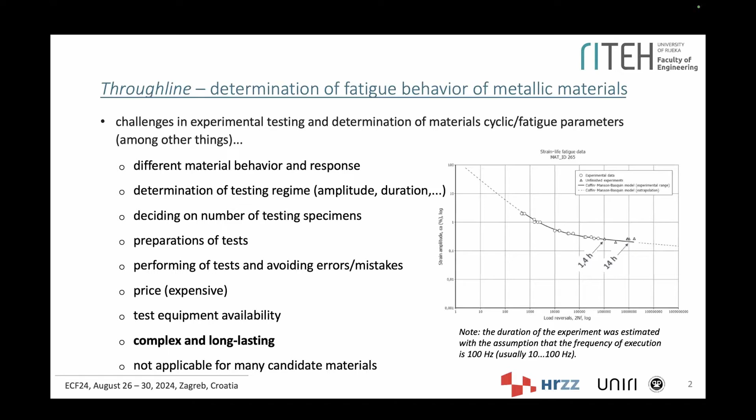Most of you are also familiar with challenges that come with performing experiments. You have to make a series of decisions, but even if you do everything properly, cyclic experiments are long-lasting, they are expensive, and often data are not available in early stages of product design.

So in the last 6 or 7 decades, estimation methods are being developed constantly. Mostly those are some kind of analytical expressions that try to predict or estimate strain life parameters from monotonic parameters. Nowadays, more and more different kinds of machine learning algorithms are used for the same problem.

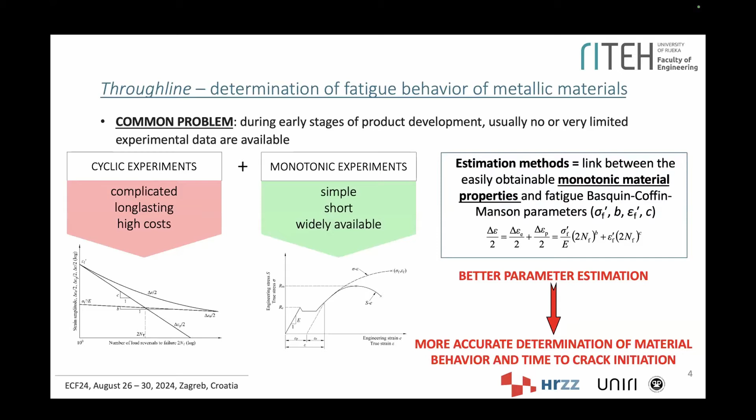So what is basically the goal? To have better parameter estimation and more accurate determination of material behavior and time to crack initiation. What we do is take monotonic properties from tensile tests.

We develop either analytical equations - maybe some of you are familiar with the hardness method proposed by Roessle and Fatemi - or nowadays, as I mentioned, we use a machine learning model and obtain some estimations of strain life parameters. Then we can use that to calculate the strain life behavior.

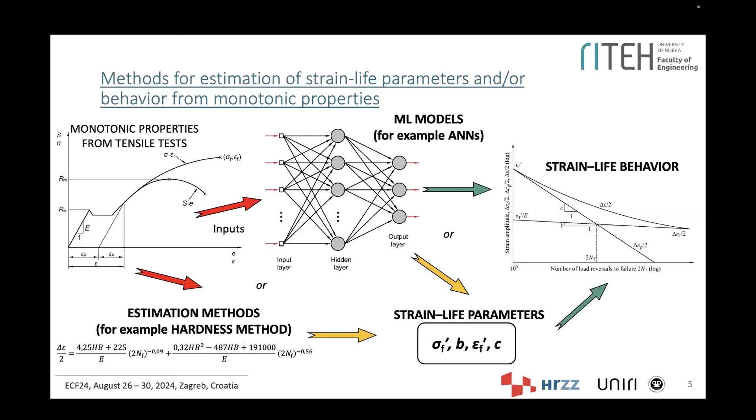So it doesn't matter the approach, but how we evaluate those methods. Usually we see some plots - for example, comparison of experimental and estimated curve. And then in papers, we read it shows good agreement, right? Okay, but we don't have numbers in particular, or we have just some general trend data without details.

Sometimes we see such scatter plots, and usually we have some kind of trend line here - a scatter plot that shows agreement between experimental and estimated data, and we have some percentage of how much data estimated falls within a certain scatter band, usually a scatter band of 3. And then again, we say, okay, it shows good agreement.

However, this is not enough to say our method is really good, or maybe it's not that good. So Park and Song in 1995 proposed additional criteria - numerical criteria that address not only the percentage of data that falls within a scatter band of 3, but also try to estimate how well the method performs, like if we evaluate on a certain data set altogether or for a single material. So those are these two.

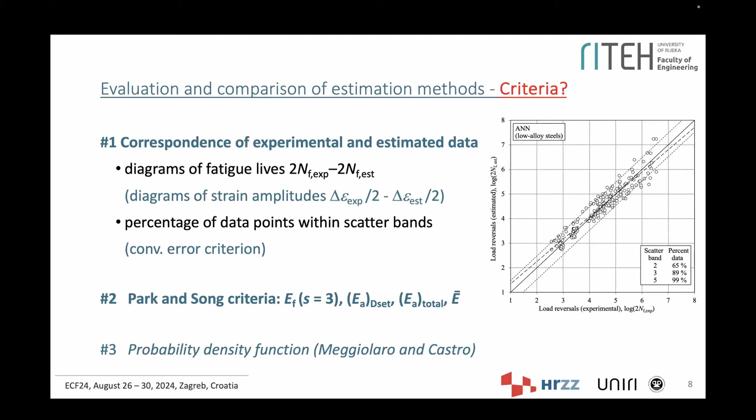You can imagine one is connected to this trend line, this dashed one, and one is connected with single data sets, and then in a certain way it is calculated. They also proposed that an average value of these three criteria is calculated, and then to make some conclusions.

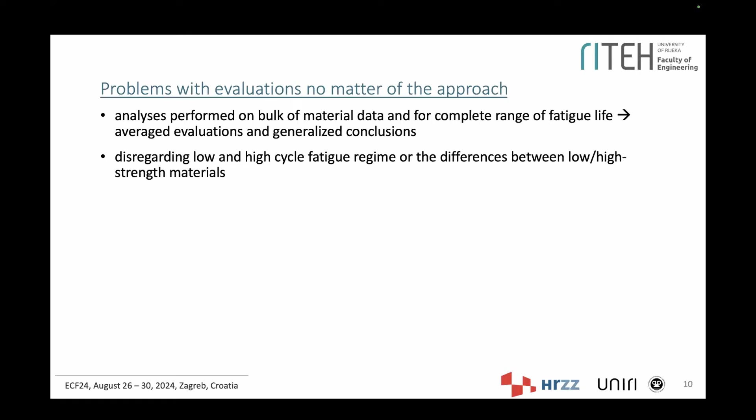So these criteria are more or less used - I would say less - but yet again, we have additional problems with evaluations. Those are commonly done on bulk material data, maybe disregarding certain subgroups of steels or metallic material in general. So everything is put together, I don't know, steels, aluminum, alloys. It's often performed for low cycle and high cycle fatigue regimes, and maybe some other specificities, particularities of certain material groups is disregarded.

So high strength materials or low strength materials - this is a problem in general with all evaluations, and there is an additional problem with machine learning based models. I will focus in this presentation on artificial neural networks because I did that. There are two aspects of evaluation. Usually performance of artificial neural network is made in some kind of way - we use various statistics like mean relative error or coefficient of correlation, coefficient of determination, and then say, okay, this is good or this is not good.

The final result, estimation of strain life behavior, is usually not done. Or if it is done, we also see some scatter plots, and we get a percentage of data that falls within a certain scatter band, and that's it, without detailed criteria. But as far as I've seen, nobody used Park and Song's criteria.

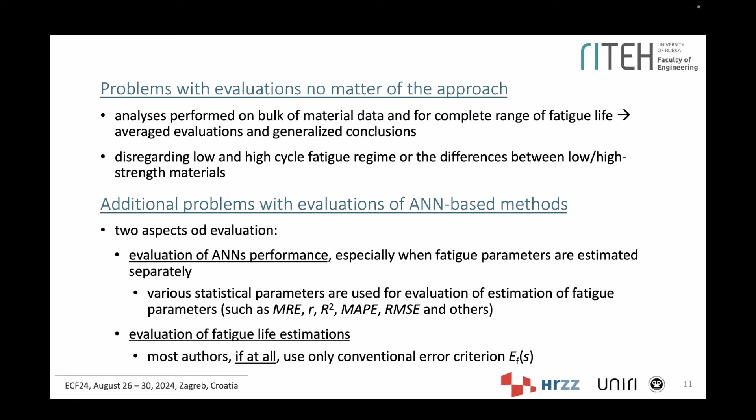for detailed assessment of results estimated with machine learning based predicted strain life parameters. Recently we published a paper in which we proposed that these Park and Song criteria are used, but that steels are divided - when we take those estimated strain life parameters and obtain fatigue lives, these are divided into low cycle and high cycle fatigue, and also high strength and low strength materials are treated separately.

You see the boundaries for steels. My colleague will tomorrow present results for aluminum and titanium alloys that differ a bit according to division, but the principle is the same. And of course, we treat unalloyed, low alloy, and high alloy steels separately.

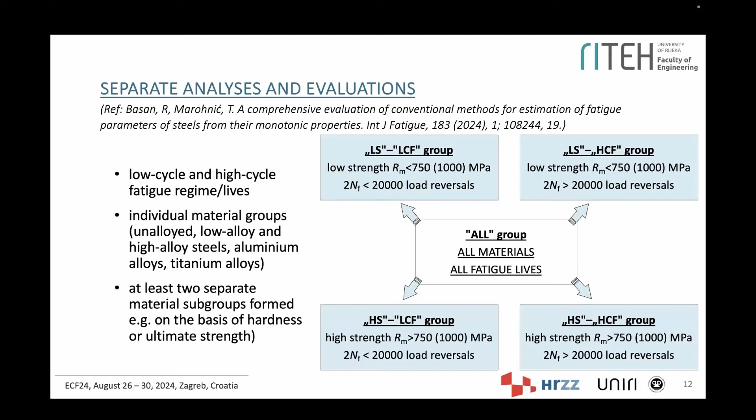Every time we do evaluations, we always use unseen data. That means those were not used for development of artificial neural networks, but we also wanted to get objective results. So we made sure as much as we could that these data were also not used in development of evaluation methods - hardness method by Roessle and Fatemi, uniform material law, and those that we chose.

I will show you, because the time is limited, the results for strain life parameters first. But every method takes monotonic properties, calculates in some way. We used artificial neural networks, and now we are at this step. We use the estimated values of strain life parameters.

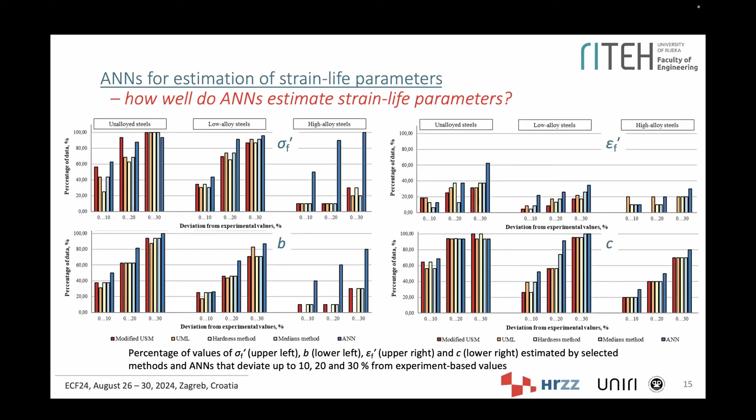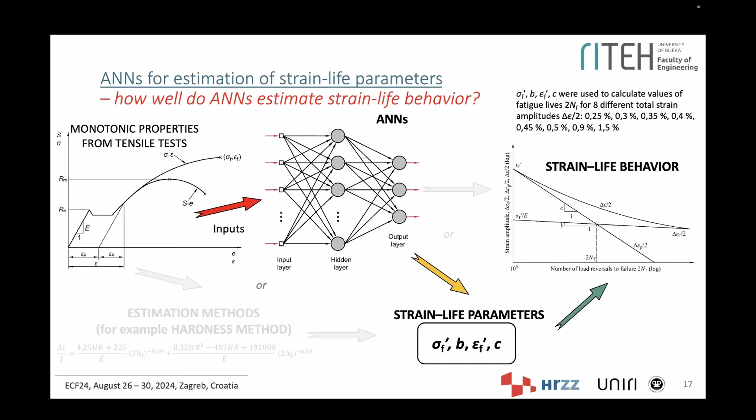So we use those parameters from artificial neural networks to calculate strain life behavior for 8 different total strain amplitudes. We could plot again these curves. I can present you one material, or 5 materials, and say it's perfect, but I'm saying in advance it's not perfect. When compared to conventional estimation methods, for this material, yeah, it's really good, but we want to see the generalization of the method.

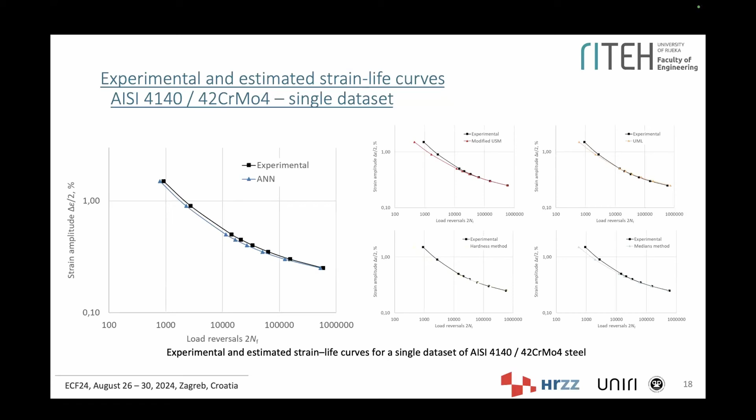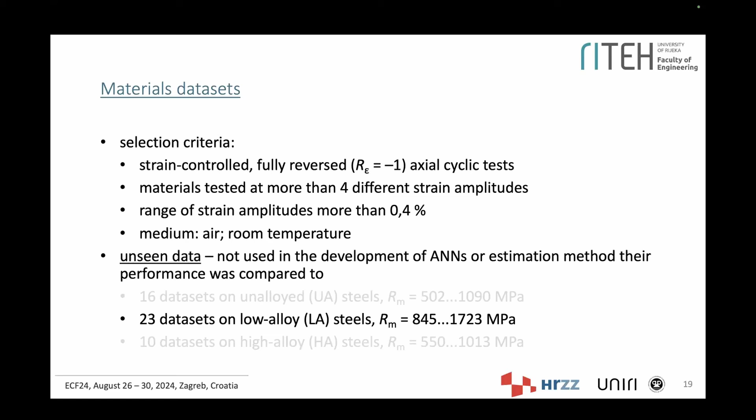Again, we are focused only on low alloy steels. We had 23 materials. Just to remember, we divided them into low strength and high strength steels. And when calculated according to experimentally calculated fatigue lives, they are divided into low cycle and high cycle fatigue regimes.

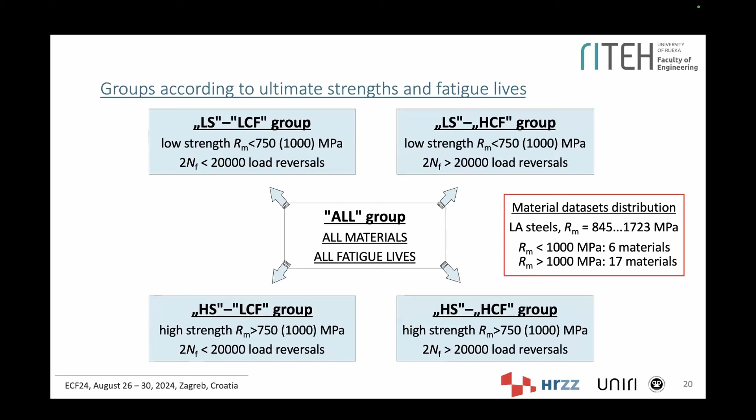Then we calculate Park and Song's criteria and obtain some numbers. The closer the number is to 1, the better. But it's really difficult from such a table to conclude something, especially if you are not really familiar with the criteria, but let's see just here.

In the first row, you have all data together, and in the second to fifth, so LS is low strength and low cycle fatigue, and that is the logic. And if we check the percentage of data that falls within the scatter band of 3, it's not that bad - it's around 0.8, 0.9, so not so bad.

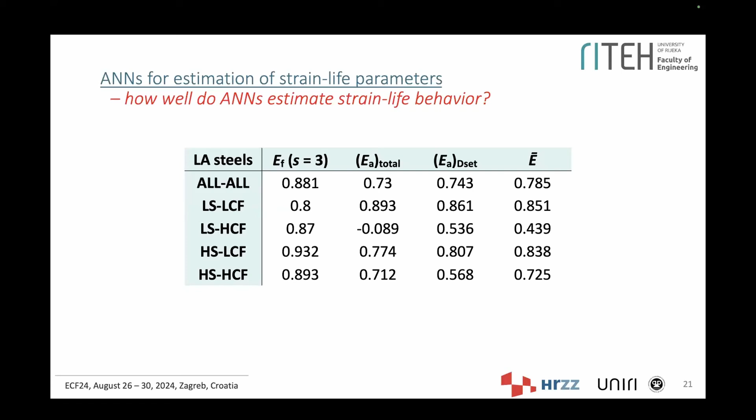But if we checked other criteria, for example, we see that we obtained minus. It can be minus for this EA total that considers that trend line, as we saw in the scatter plot I will present on the next slide.

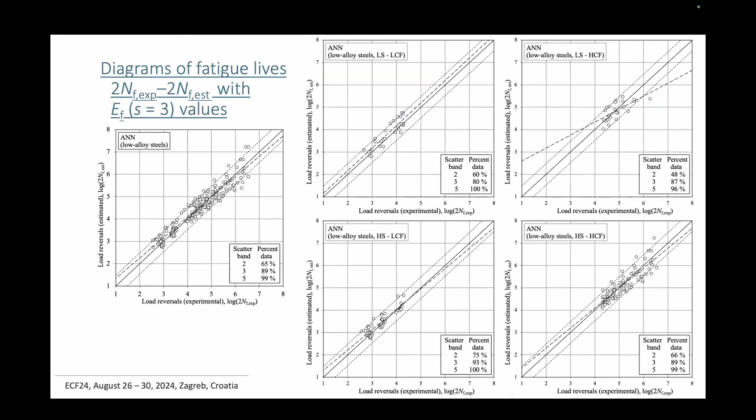So here are diagrams for all data together, and again for that division that I showed you. Most of these points fall within that scatter band, but here we have some deviation because this trend line is inclined. It's not really something we want, it quite differs from the perfect line.

And if we connect that with the table we saw on the slide before, that is actually the group where we obtained minus for one criteria. And if you have minus in one criteria and you want everything to be as close to plus 1 as possible, it will affect the average value of these three criteria.

So what can we say? Are neural networks good at estimating parameters or not? Neither good nor bad. But I want to warn you that when we do evaluations, we have to be really careful what we take and how we use it.

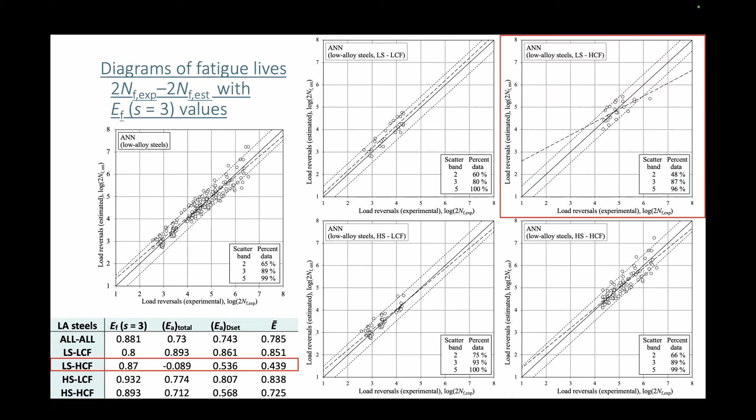It's interesting also to see, for these low strength, high cycle fatigue results, what results we obtained with other methods, analytical equations which are widely used. So I put a table for all steels together, without that data division, and for that particular problematic subgroup of data.

Compare it to the modified universal slopes method, uniform material law, and hardness method, which perform really well. Here we can see that artificial neural networks are either comparable to some widely used methods, of course for this data set we used, because estimations and evaluations always rely heavily on the data we have.

And we must mind that we don't extrapolate, and everything that goes with that.

But when we check results for low strength, high cycle fatigue, and that criteria where we obtained minus, we see that other methods don't perform that well either. It's better than artificial neural networks definitely, but also only around 0.3, 0.4. And when we see this average value, artificial neural networks are again somewhere comparable with UML, slightly worse than the modified universal slopes method and hardness method.

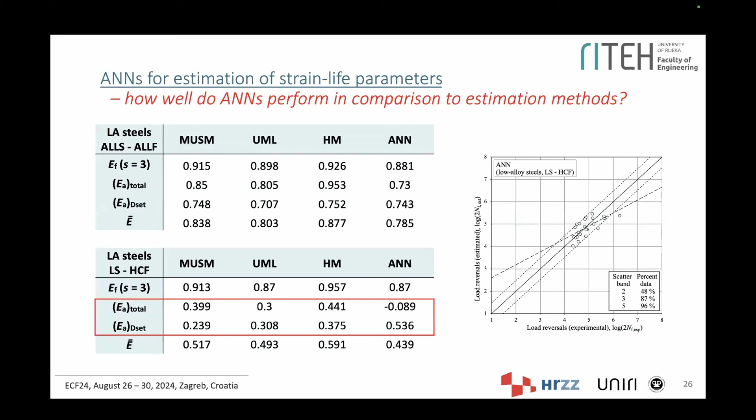Okay, so what was the point of this presentation? The point is that the methodology for evaluation of these methods, it doesn't matter which tool you use, has to be the same. So it has to be unified, so you can compare the results to some other paper.

It is always a problem with artificial neural networks that you usually cannot repeat somebody else's research, and you usually don't have their code or results, so you can make a direct comparison to your investigation. So that is actually the conclusion, that comparability is a must, because for now we can only judge that something looks reasonable enough, and we have to trust the results based on those scatter diagrams, or maybe comparison of experimental and estimated curves.

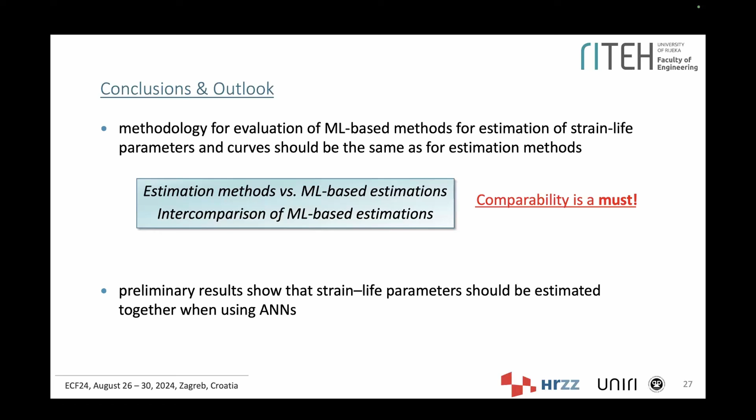We are also always interested in the outlook, and how we can improve estimations. For now we were experimenting with estimations of parameters all together, not separately as was done - I didn't go into details because of limited time. So we think there is something that can be improved if we did estimations for all parameters together.